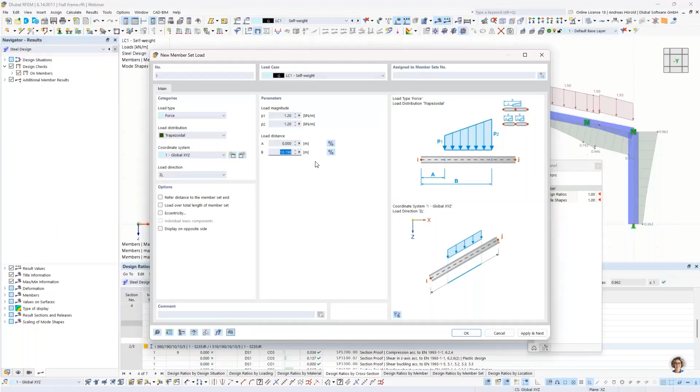It should be a force, not uniform but trapezoidal. Load direction ZL, as you can see on the image. That's okay. The load magnitude should be 1.2. The start is 0, and we measure the endpoint at the half beam, 10.198 meters.

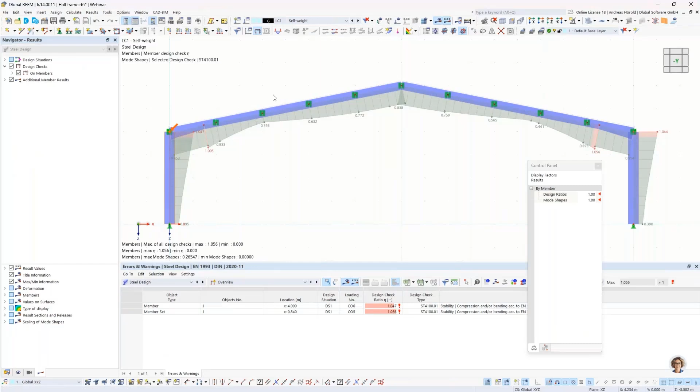This member set — okay, so let's run the steel design again. As you can see, now we have an overloading. The target is to have a maximum design check ratio of 1.0, and we try how many solar panels can be placed here.

So I go back to the self-weight load case, and in the first step I change the load length. I start with a load length of 1 meter. Now we need to activate the add-on module Optimization.

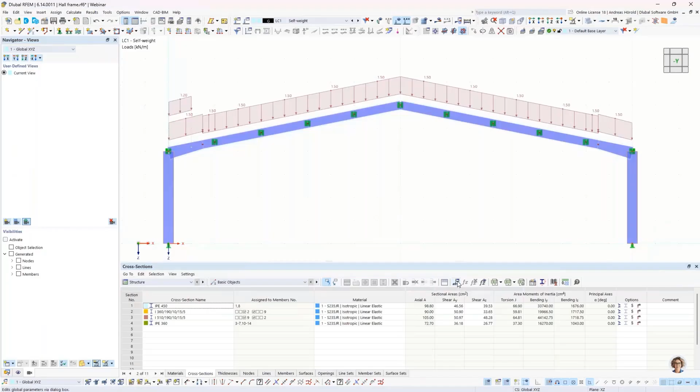So then we have to set a global parameter. I call it solar area — it's the length. Solar area, that should be possible. Length, definition type: optimization. The value is currently 1 meter, and the optimization parameters are minimum 1 meter, maximum 10 meters, and the increment should be 1 meter. That's all.

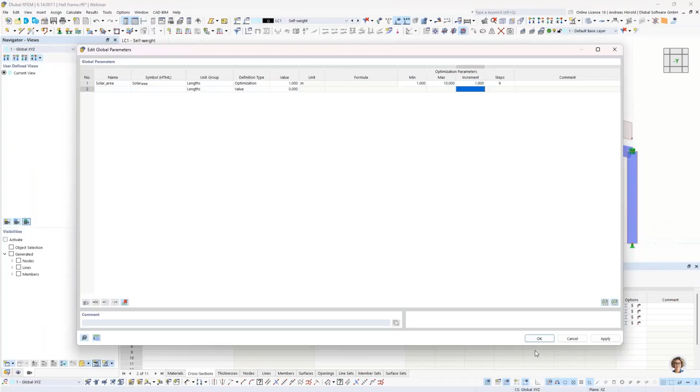Leave the dialog. I go back to the load with a double click, and we assign here the formula. By clicking that button, I select the solar area and insert. That's all for that.

Next, I go to Calculate, Optimization Settings, where there are different optimizers such as particle swarm, ant colony, and so on. I use all mutations since we would like to calculate all possibilities; to decrease the number of calculations you can use such optimizers.

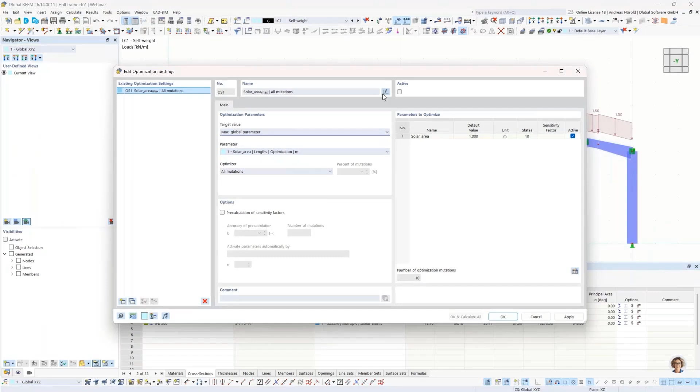We already showed that in webinars about the add-on module Optimization — maybe Max can put a link in the chat to those webinars. So the target value should be maximum global parameter, the length should be optimized, and there are 10 states. I click to activate and run the optimization.

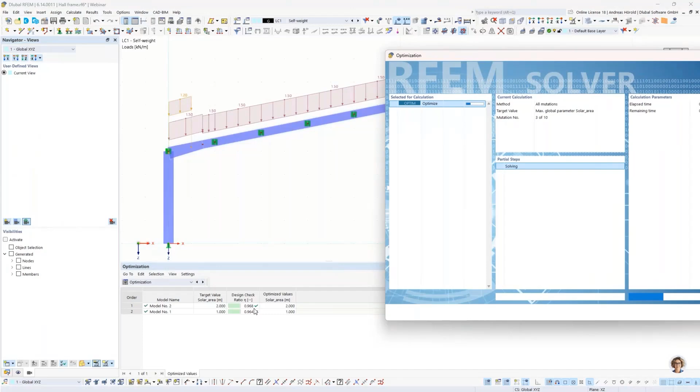So now all 10 possibilities, the different load combinations, and the steel design are running in the background, and we get the first results. For 1 meter we have a small reserve. Now you can see when the load length is increased, the design check ratio will also increase. The maximum design check ratio should be 1.0, meaning 100%.

Now we've got, at 6 meters, 99.9%. The next step should show overloading. Okay, now let's calculate all optimization steps.

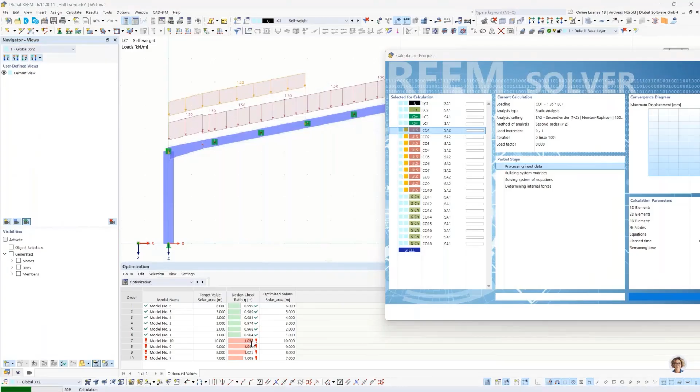Okay, for 10 meters we've got an overloading over 5%, so the program exceeded the maximum length here. Let's go to the steel design, and you can see where the maximum design check ratio is for 6 meters. That means the maximum length for the solar panels is 6 meters.

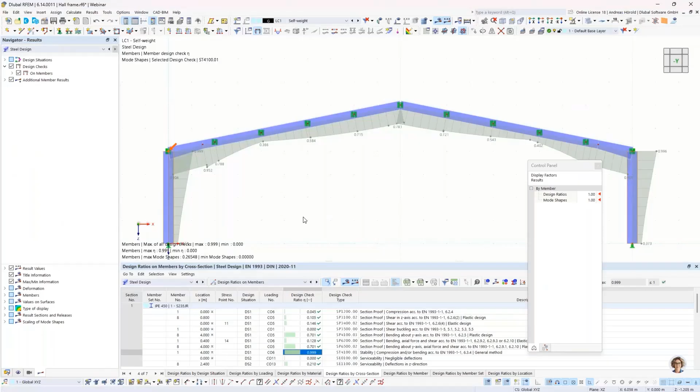You can use that on model optimization not only for loads, but also for cross sections, dimensions, and so on. You can see that in the webinars about the model optimization add-on. Okay, that should be all for that model and for that question.

It's the next model, and the next question is, can I model punching reinforcement using double-headed studs in RFEM 6? That question was asked very often in the past, and now we can provide such a possibility.

In the first step, we would like to run a punching design. So I double click at the node, and in this dialog I check the punching design, without only punching reinforcement in the first step. Let's run the calculation. Concrete design, objects to design. Okay, we calculate the surface and that node.

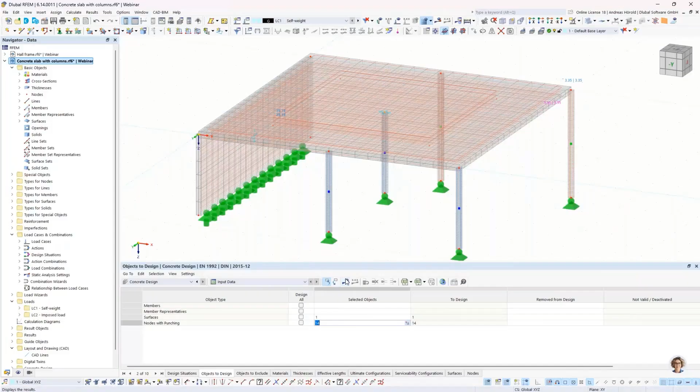So then design ratio on nodes. Okay, that doesn't work, we have an overloading. And let's set or consider a punching reinforcement.

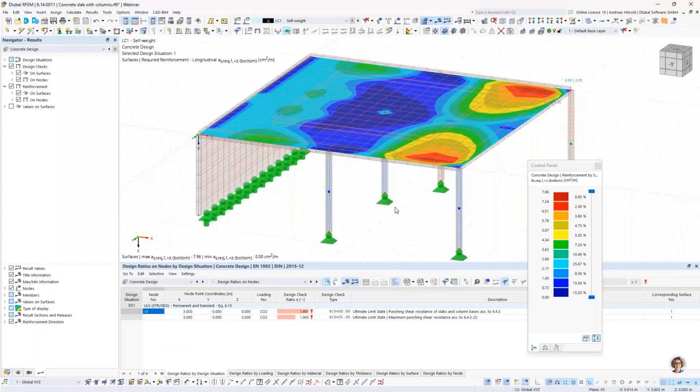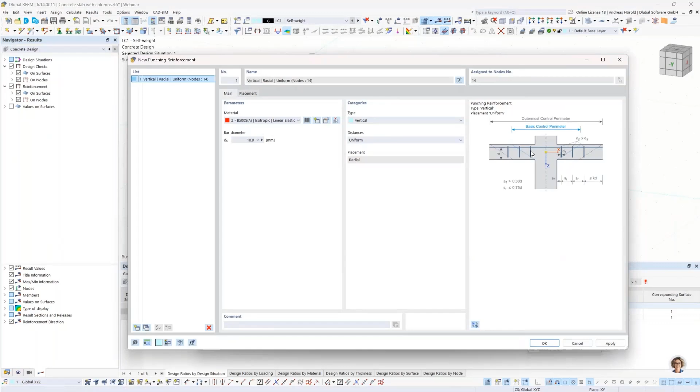I double click the node, then I select a new punching reinforcement. There's the possibility to assign vertical punching reinforcement, but also double-headed studs with a ribbed shaft or with a smooth shaft. I use the ribbed shaft, stud diameter 10 millimeters.

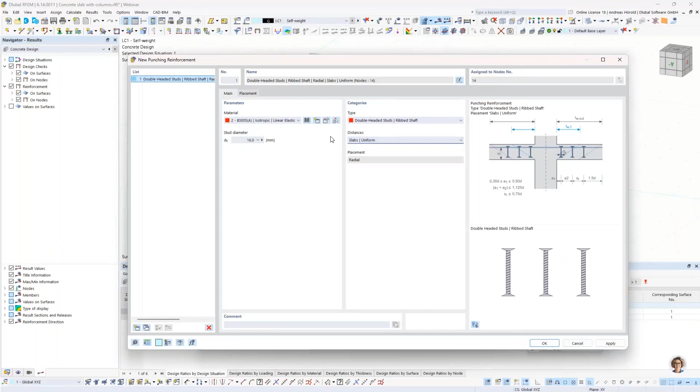You can choose between different distances: slabs uniform, foundation uniform, and general. I use it for slabs. And for these parameters, for example the number of perimeters and so on, I'll leave the default setting in the first step.

Okay, you can see the punching reinforcement here, and I run the calculation. So design ratio nodes. Okay, we have also an overloading. We have to put in more punching reinforcement in the slab.

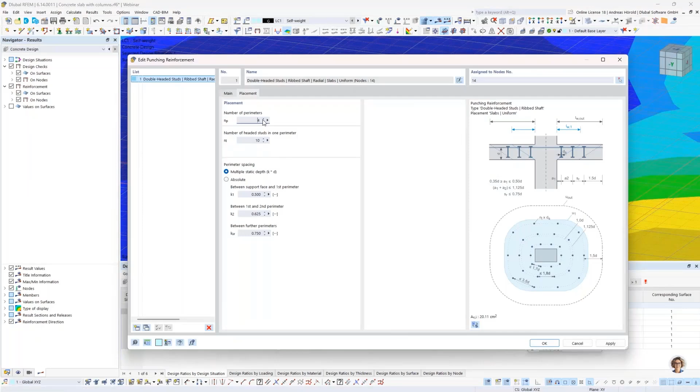I double click on the punching reinforcement, and I have to increase, for example, the number of headed studs and so on, or the number of perimeters. I change the number to 4 and run the calculation again.

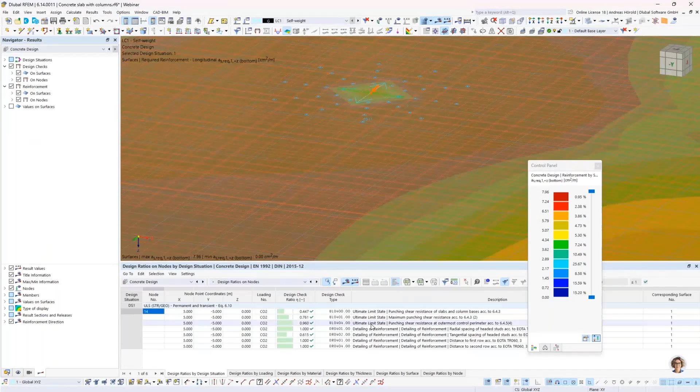Okay, now it works. All design check ratios are under 1 or equal to 1. When you double click on the line here, you can see the design check in detail. And of course, you can print these checks directly to the printer, printout report, or to a PDF. All is possible.

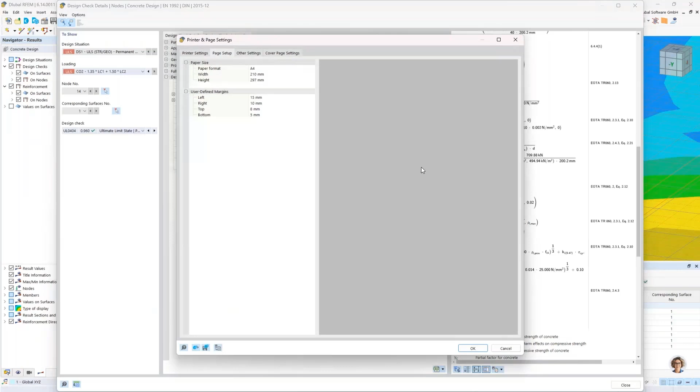Let's take a look at the PDF, how it would look like in the printout report. Take some seconds. Okay, good. That was all from my side.

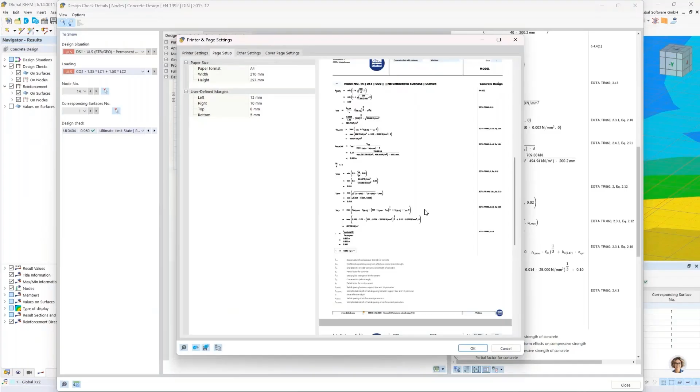So a question we frequently receive in our support team concerns the load application point: how to define the load application point, when it is critical, and when it is absolutely necessary to define the load application point. So I would like to discuss this with you together using a really simple model here.

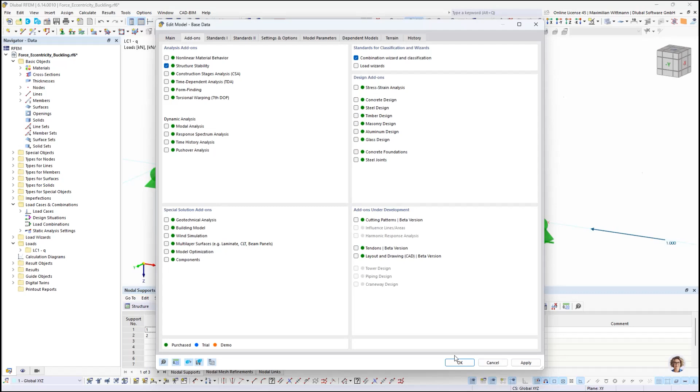All right, so let's go to the base data and have a look into the add-ons. As we can see, no add-ons have been assigned yet, but we will check the structure stability to investigate the torsional buckling later on. Of course, we now have to assign it to a load case, and in this case we only have one load case, and I will activate it at that point.

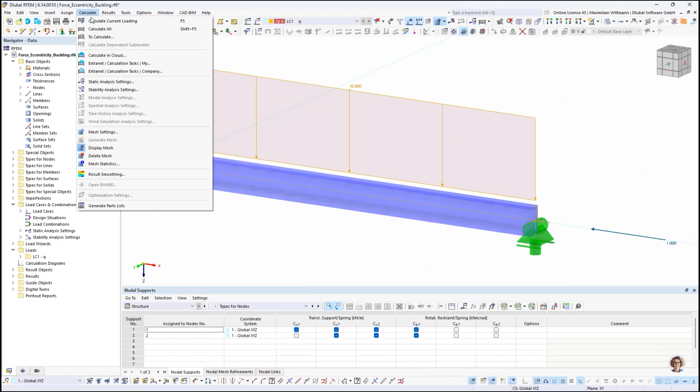Okay, now the question comes up how we can define the load application point itself. To do so, we simply double click on the load itself, and here you find the entry eccentricity. By default, RFEM assigns the external load to the shear center, but if we want to assign it to the center of gravity, we can check this checkbox, and you now see the load is assigned exactly in the center of gravity, and we will expect a twisting moment at that point. Okay, let's confirm it and let's calculate everything.

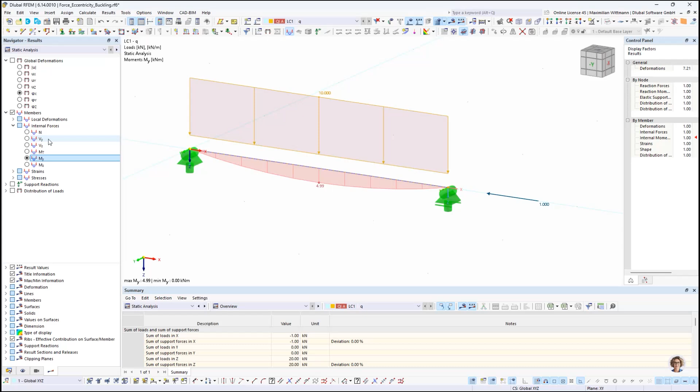In a first step, we want to have a look at the internal forces, respectively the stress resultants. What we can see here is we have a normal force of 1 kilonewton, which comes from the external load. We have a bending moment of 5 kilonewton meters, and of course the corresponding shear forces.

And we also have a bending moment around the weak axis of 0.35, which results from the calculation according to second order analysis, respectively the P-delta effect. And as we expect, we also have the twisting moment here of 0.45.

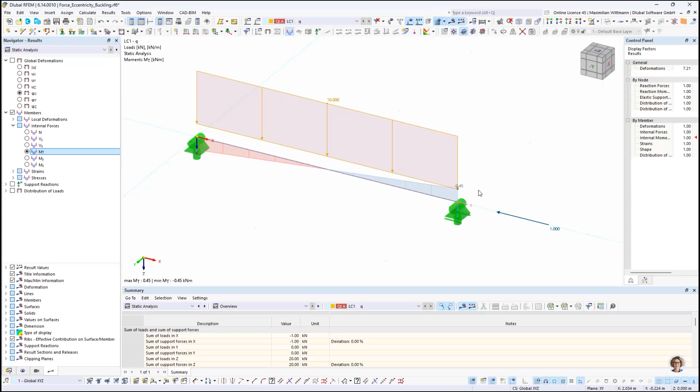But what is much more interesting now is, of course, the stability analysis. Let's have a look at the critical load factor, and this is 405, which means we can increase the load by the factor of 405 until stability problems occur.

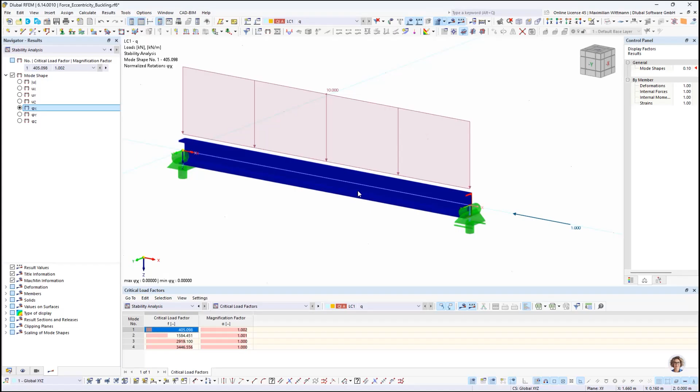Let's check the mode shapes here. What we can observe is that we have purely lateral buckling at that point. Usually we would expect also torsional effects, but when we check the rotation around the x-axis, we see this is 0, which means at that point it seems that it's only affected by the normal force. This is because we currently calculate with 6 degrees of freedom, meaning that, for example, torsion or bending moments cannot induce axial stresses, for example, here in the top flange.

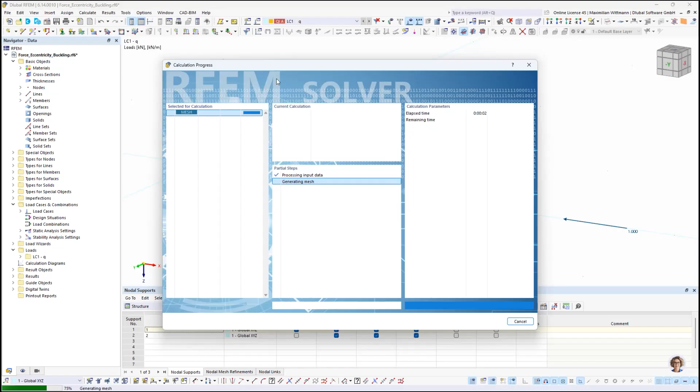So in the next step, we now activate under add-ons also the torsional warping, so the calculations with 7 degrees of freedom, and calculate everything again. Now it's really interesting what happens with the factors.

If we go back to the stability analysis again, the first thing we see is that the critical load factor dropped significantly from 405 to 9.5.

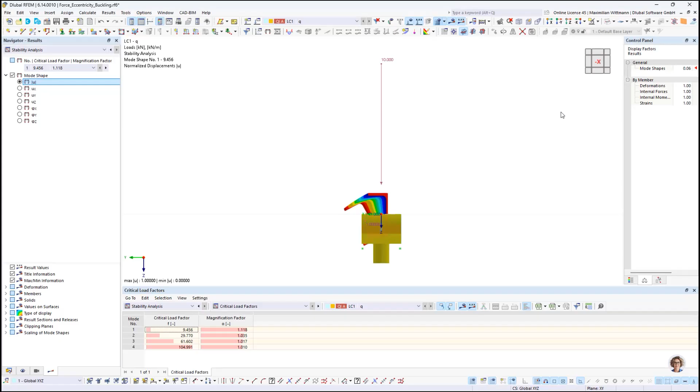When we check the eigenmode, the mode shapes, we now can see that the eigenmode shows not only lateral displacement as before, but also cross-section rotations. This is what we would expect from bending torsion or bending buckling in this case. Also, when we check the rotation around the x-axis, we now can see that this also has an effect. In total, this means that if we ignore torsion effects and the normal stresses resulting from them, we would significantly overestimate the entire system at that point.

But this is not even the worst case scenario, because we now can additionally change the load application point to the top flange. We then will expect additional destabilizing effects, as you know. And how can we do that?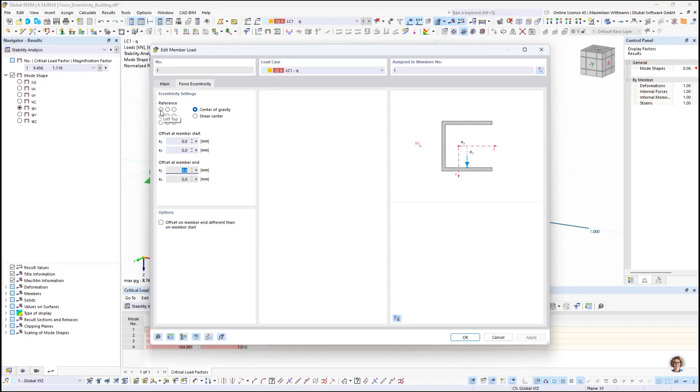We here can change the reference point to the most top left point, and then enter manually the distance to the center of gravity, which was 21.7. Let's hit OK. And when we now go to the side view, we see that the load straight comes down to where the center of gravity hits the top flange. So when we now calculate everything again...

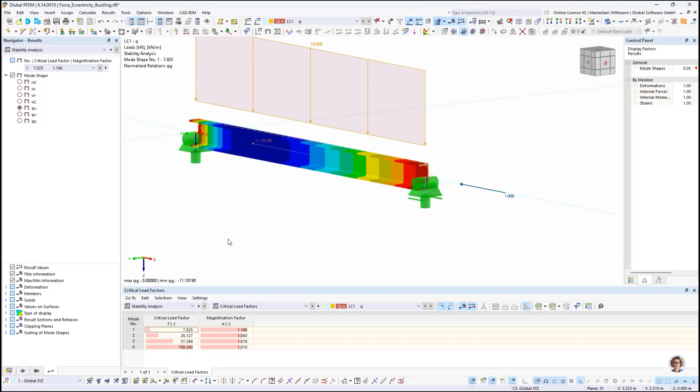We are once again interested in the critical load factor. Please remember, last time we had 9.5, and now it once again dropped to 7.0. I think at this point we really can see that as soon as we have torsional effects, it is absolutely crucial to consider the load application point and the resulting destabilizing effects.

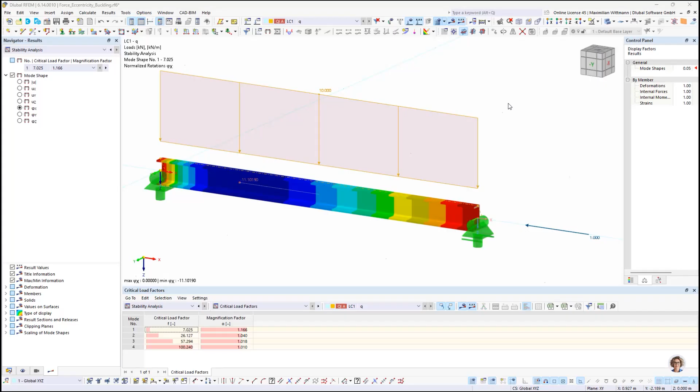Now, some RFEM expert users might say, but what about our stability checks in the steel design? Aren't these effects what we have seen not covered by the stability checks? To discuss or explain this question, we now have a look into the steel design and go to the appropriate settings. So we find it here under steel design, then ultimate configurations.

When we double click on the default value, we have this tab here, member stability. Here you find the important section, the position of the positive transverse load application. Here the vertical position is set by default on the profile edge with the destabilizing effect, exactly what we have seen in the previous example.

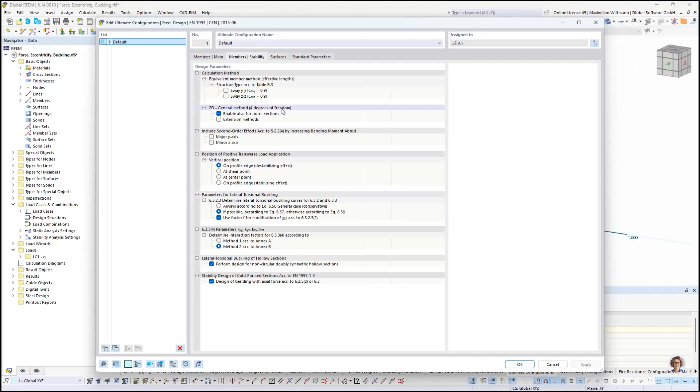However, the problem comes from the standards, because in the standards for both methods, the equivalent member method as well as the general method with 4 degrees of freedom, torsion is not considered in the stability checks. So once again, the problem comes from the standards. But we really have seen how important the stability effects that result from torsion and bending are, and that they cannot be ignored at that point, especially for thin-walled open structures.

This is why for these structures where we have these torsional effects, unfortunately the equivalent member method as well as the general method would lead to results on the unsafe side. So my answer is always, please use our add-ons with 7 degrees of freedom to gain results on the safe side. All right.

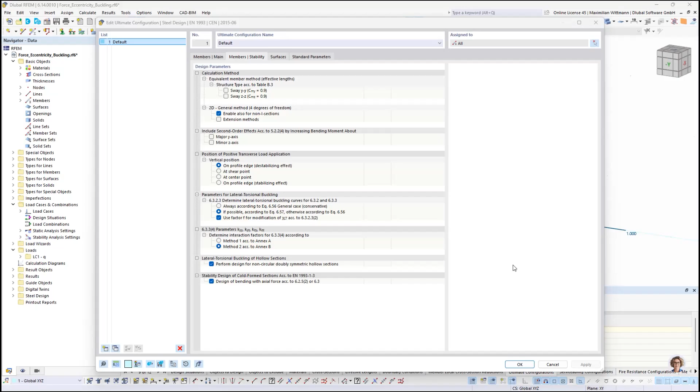So let's move on to the second example of this webinar. We often receive the question if there is another possibility to investigate the effects of torsional warping rather than using the analysis with 7 degrees of freedom. And yes, in principle, you also could use shell elements to detect the behavior of torsional buckling.

So let's copy the actual system. Let's create a copy, and we copy it in a distance of 1.5 meters in the y direction, and also we include the loading here at that point.

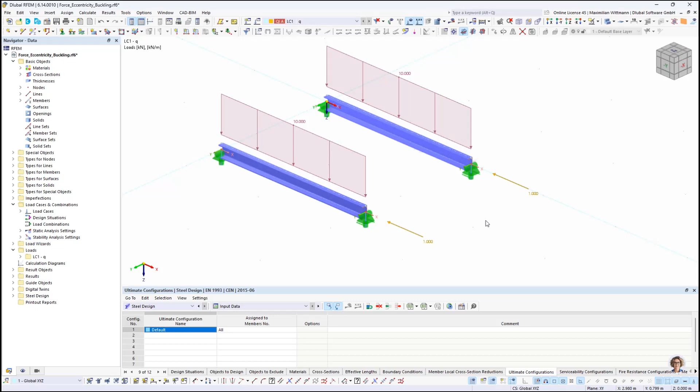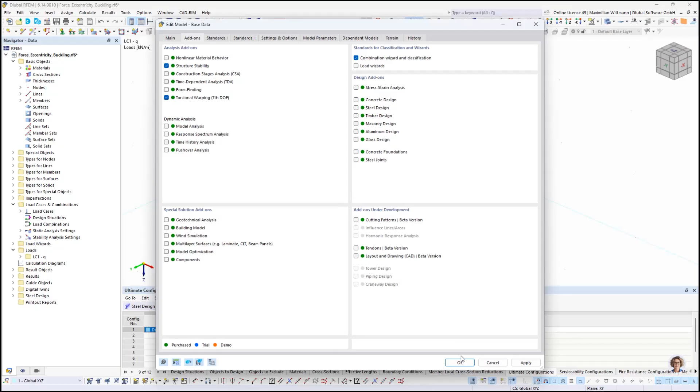What we have seen in the previous example is that the axial forces are of minor impact and interest here for this system, and it's dominated by the uniform distributed load. Also we can change the sliding supports to normal pin supports at that point. And what is also not necessary are the steel design settings, so we can turn that one off too.

In order to create shell elements, we have a simple option here in RFEM. Just select the member, make a right click, and then under members, you can generate a surface from members.

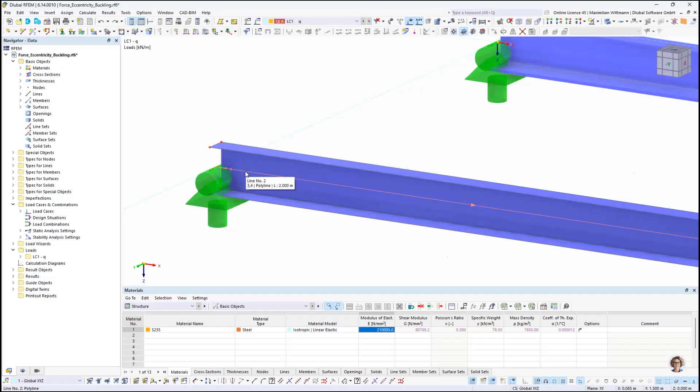Probably you already noticed that we now lost our uniform distributed member load. This is because we are now dealing with surface elements, and of course lines and line loads, not member loads anymore. What is also still remaining from the original system is the centroidal axis. So we have this information, but for now let's focus on the loading.

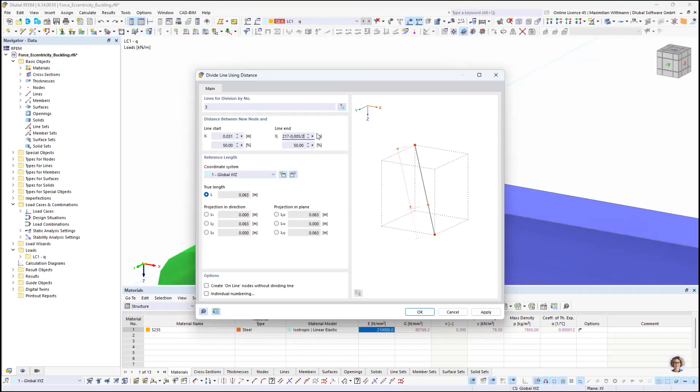I want to split this line to hit the center of gravity. I use the divide line command at a distance, and as I know that the center of gravity has a distance to the left side of the web of 21.7 millimeters, I additionally must subtract half of the web thickness. So let's enter this: 0.0217 minus 5 millimeters divided by 2. And here we go, we have the new point.

So now we can draw the line to the other side of the beam, and we can be sure that we are now in the plane of the center of gravity. So we now can assign the line load. Still we have 10 kilonewton per meter, and we assign it to our new line. Let's hit OK, and we have our load back at that point.

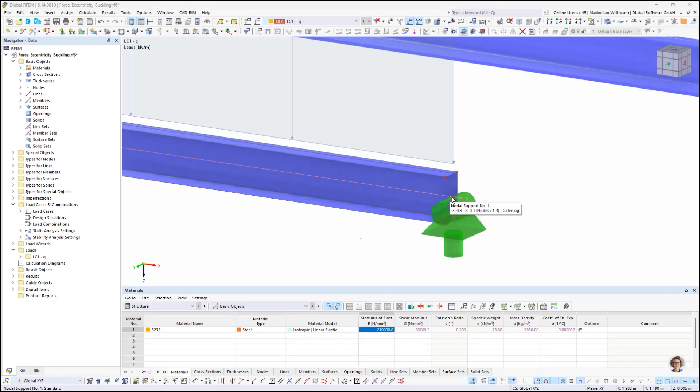What still catches the eye at that point is that the pin support is connected to the centroidal line, but we do not have any connections to the surrounding surface elements up to now. But this is no problem in RFEM. We can go under types for nodes and introduce nodal links.

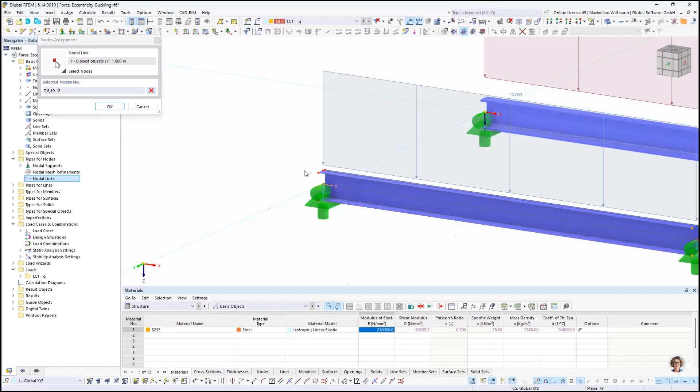Here in the first step, we have to select the outer nodes of the cross sections on the right and on the left side. Confirm it, and what this method does is it searches the nearest elements to these nodes.

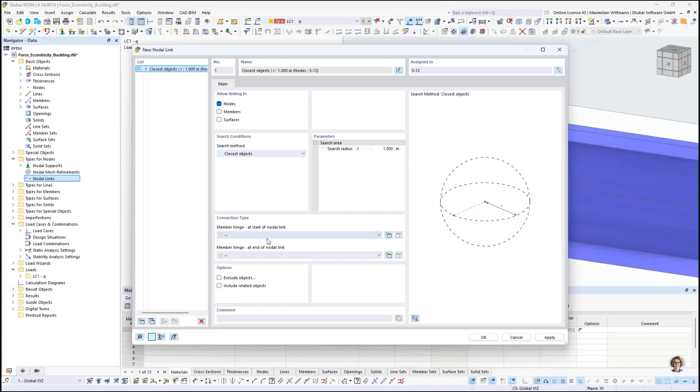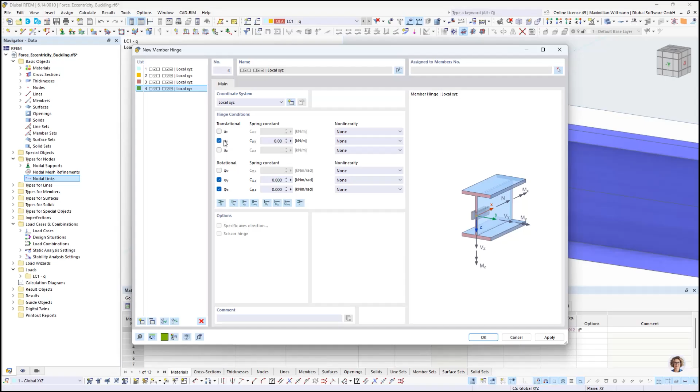What is really important to mention at that point is that when we think back to the member beam, we did not define any transverse stiffness, for example, in the area of the supports. So we have really a free warping behavior in the area of the supports. And we must, of course, model the same effects here for the surface elements, and for that we can release the degree of freedom in the local y direction of the rigids, which corresponds to the global x-axis. Let's hit OK, and we now can see that the connection is created.

Now let's have a look also in the mesh settings. 0.5 meters is too coarse here, and I decide to go with 1 centimeter.

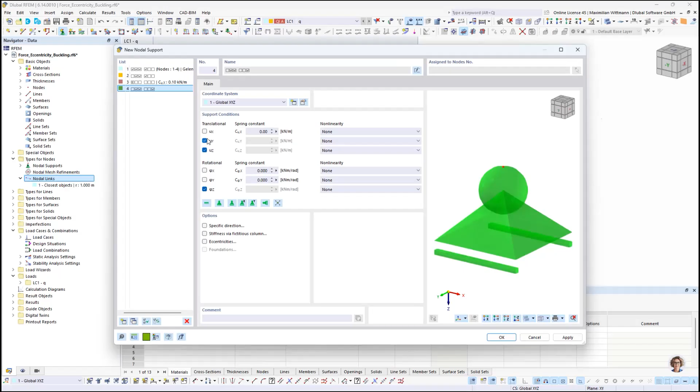What is still missing: we now would have a free movement in the global X direction due to the introduced links. To get a stable system, I create a new support here and introduce a really small spring at that point. Hit OK, and assign it to this node.

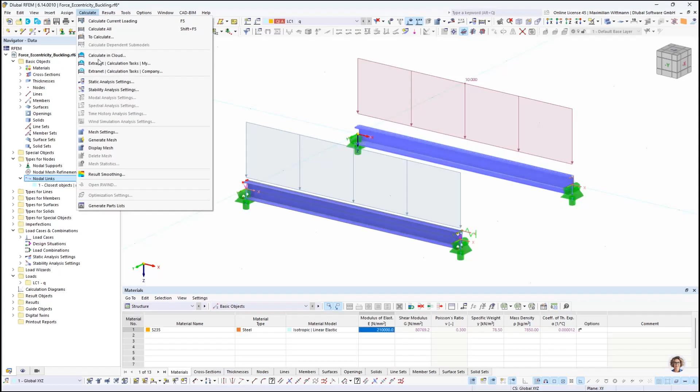Okay, let's check the results at that point. So it converges perfectly. And in the next step, let's move on to the stability analysis and check the critical load factors.

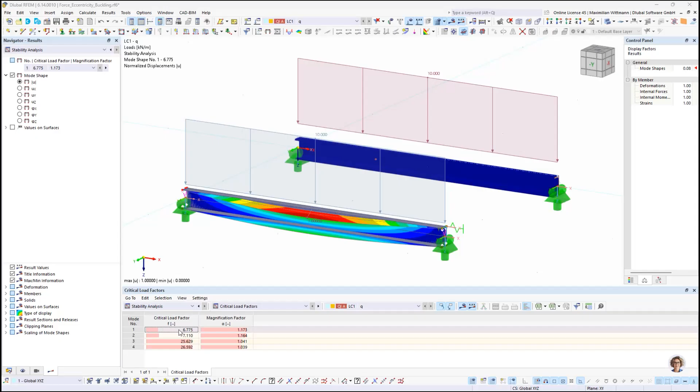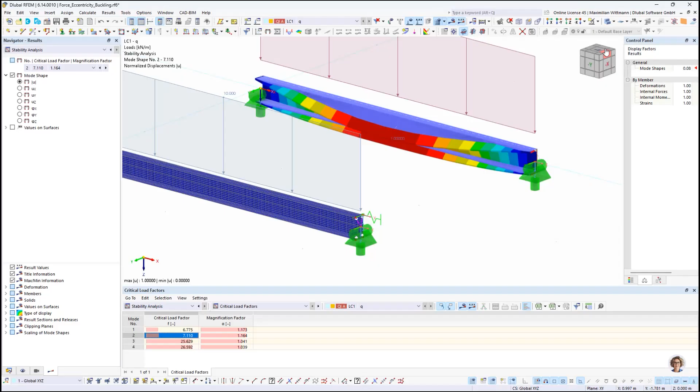Let's compare the mode shapes. The first critical load factor can be found at 6.8, and it is assigned to the surface model. The next one is 7.1, which is assigned to the member beam. So we can see we only have a deviation of approximately 4%, and this is a really good result that we achieve here.

Also, I want to have a short look at the free warping at the end, and when we increase that factor a little bit, you can see that we have free warping here at the supports, and the same occurs when we check the rotation around, the deformation in the X direction, and you see we have the same effect here. So one could say we have really good results also when it comes to torsional buckling and working with surface elements. All right, perfect.

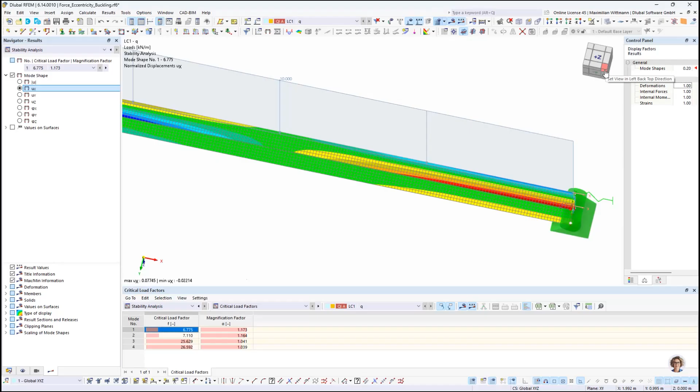Okay, so let's move on to the last example. Here we want to talk about built-up cross-sections, respectively composite cross-sections. We often receive the question how to model multiple cross-sections or assign multiple cross-sections to one line while having full control of the independent profiles.

Once again, I brought a very simple model here. This is just a line with a length of 5 meters, and we have the pin supports with an axial force of 10 kilonewtons. This, for example, could be a wind bracing, and I decided to apply a compression force here because I want to talk about steel design afterwards.

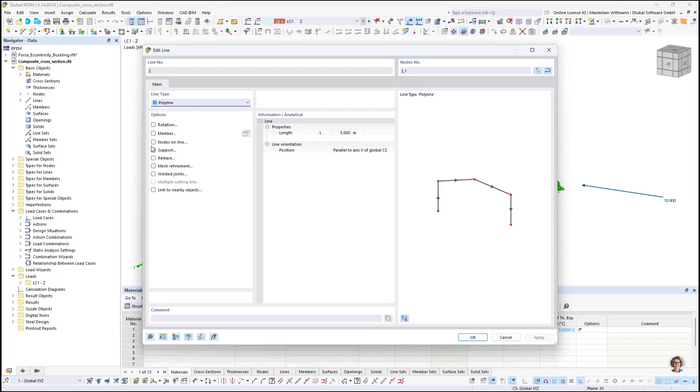So what would be the standard way to apply here a built-up cross-section? You see here on the left side, when you do a double click on the line, you can assign a member, and then under cross-section, we can pick a new one from the library, and you find the built-up cross-sections in this section here. In our case, I want to use an equal-leg angle, and I think this one would be good here.

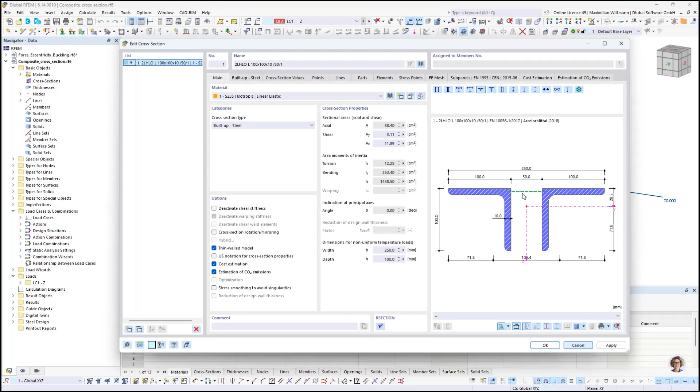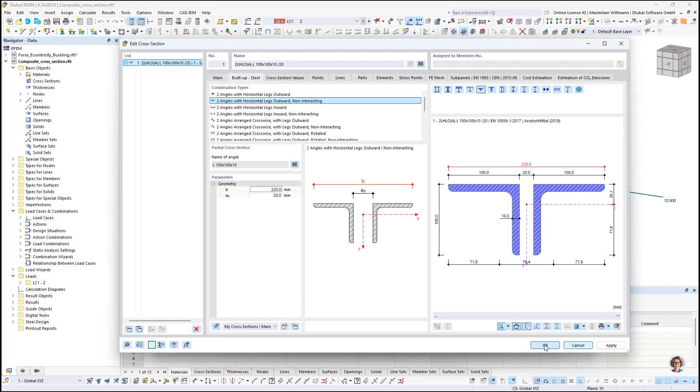But as you can see, the green line represents an interaction between both profiles, and I really want a decoupled system here. So we can go over to the second tab, and you see you can choose between different directions between the two angles here. In the second one, the green line is not there anymore, which means we have a decoupled system. So I want to go with a distance between the angles of 20 millimeters. I hit OK, OK once again.

And we now check if it is applied correctly. And yeah, this looks good.

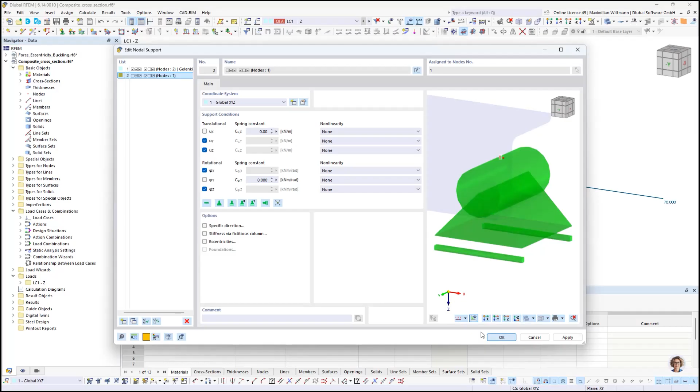Okay, what now still catches my eye is the fact that we have to lock the rotation around the local x-axis in order to get a stable system here, because for now the beam could rotate around its own x-axis. We have to do it for both supports, also on the right side for the sliding support. Let's also activate or lock the rotation at that point. And now everything should be ready for calculation.

Let's hit calculate all. What you can see is that I already activated the steel design, but in the first step, we want to check the internal forces here.

So as you can see, when we look at the normal force, the axial force results in an entire normal force in the section, in the cross section, even though we have two profiles here. Of course, if you want to use this bracing in an entire 3D system, the stiffness is implemented correctly. So all cross-section properties are assigned correctly. The overall behavior is correct.

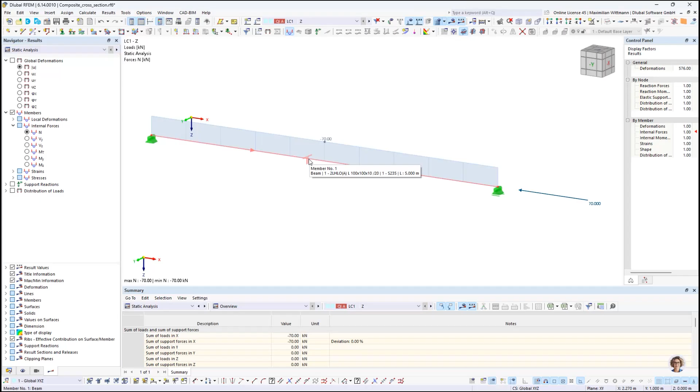But if you want to perform detailed checks for every single profile, we have to find another solution. This you also can see if we go over to the steel design, we get the error that the design is not possible due to invalid section shape for design. So the question comes up how we now can achieve this.

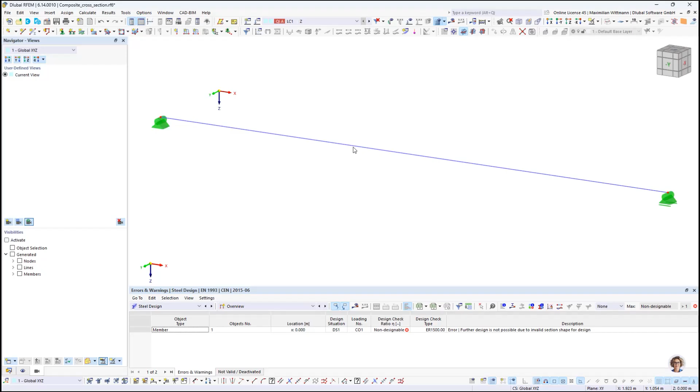The keyword here is line releases, but we will come to this later on. In a first step, we have to change the composite cross-section and swap it to a standard cross-section. For this, we can go to the library and you find here the standard cross-sections. We want to have an equal angle, so we can take this one, and it was a 100 times 100 times 10 millimeters.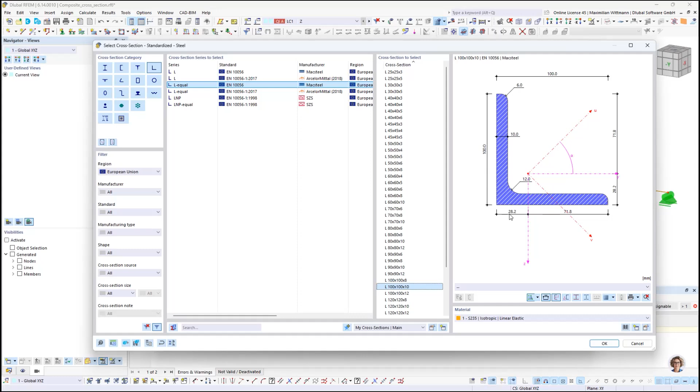And what also catches the eye here is that we have a distance to the centroid of 28.2, but still we want to realize the gap of 20 millimeters. So we have to add additional 10 millimeters to end up in the center line, so we end up with 38.2 millimeters. All right, so we see we still have to rotate it by 90 degrees.

And now we see we can assign the eccentricity to the local Z direction. This can be found under main and then eccentricities, and here we can define a new one. For this purpose, it's good to work with absolute eccentricities, and as we said, in the Z direction, minus 38.2 millimeters. Let's hit OK.

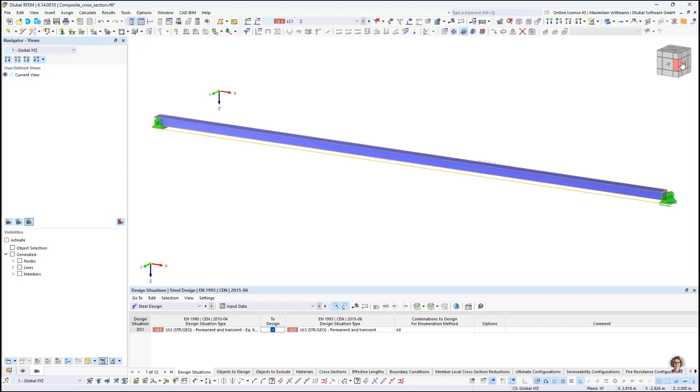We have to assign it not only at the member start, but also at the member end. Let's hit OK, and let's check if everything is correct. Okay, so we have the first half of the composite cross-section at that point.

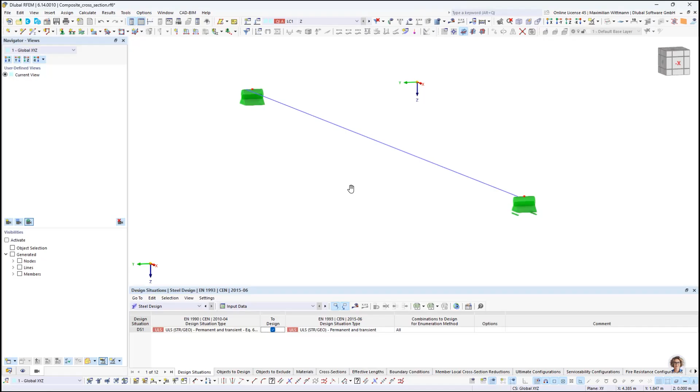Okay, now we must find a solution how we can add a second profile here and assign it to the same line. Of course it's not the same line, but we have another possibility, and as I mentioned, we have line releases. Let's have a look at this option.

You find it here under data, and then under the special objects, we can add a new line release. So let's go through this dialog, and in the first step, we have to assign the line, of course it's our basic line here, and then let's have a look at the picture. What it does is create a second line that is released, where we can define the interaction between the two lines. This can be done by the line release type.

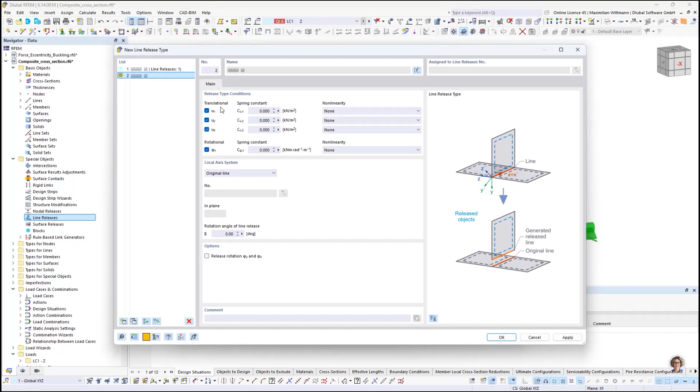Let's create a new one, and as we don't want to have any interactions, we can check every degree of freedom, confirm by OK. And so the next step is the released objects.

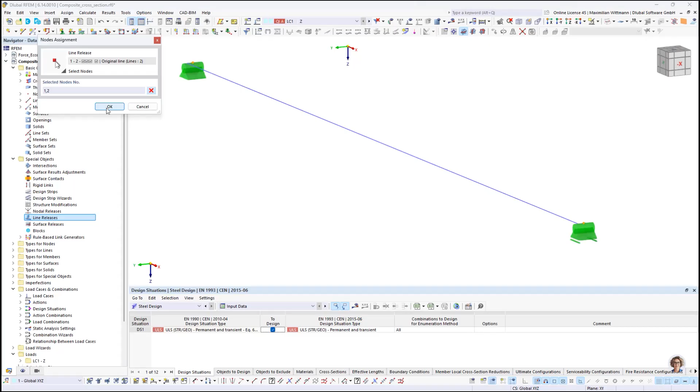In this case, it's clear we have to release a member, so let's select our member. What's also very important is the definition of objects and the nodes as definition nodes. So when we select the outer nodes at the supports, these nodes are not copied, they stay original, and the load transmission takes place at these points, with no interaction along the lines. Let's hit OK, and everything is ready here.

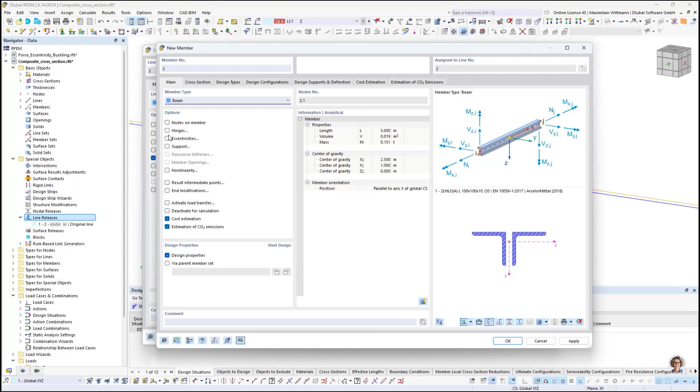Now we have a second line to which we can assign a second profile. This can be done by double clicking on the new line, and then we can check that the line also has a member. When we go to cross sections, we can choose the latest cross section, and we see that we have to rotate it once again into the correct position.

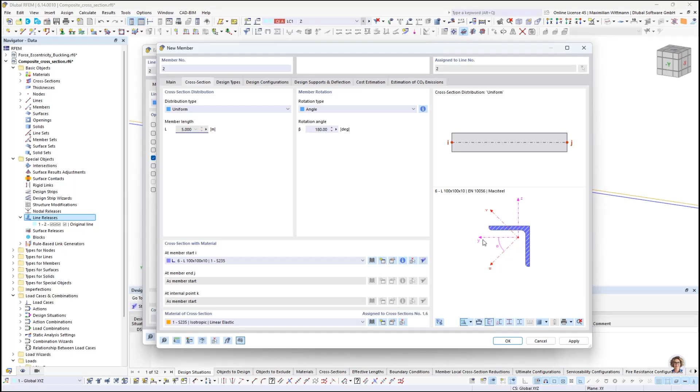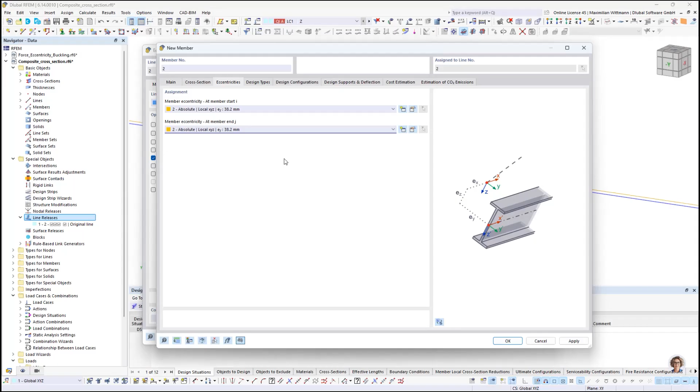This time we have to use 180 degrees, sorry, and this time the eccentricity must be assigned in the local y direction. Let's do this the same way: we create a new eccentricity, once again absolute, and assign it in the local y direction with 38.2, once again assigned to the member start and the member end. Let's hit OK, and hopefully now the cross section is correct.

And yeah, perfect. So we see everything worked fine.

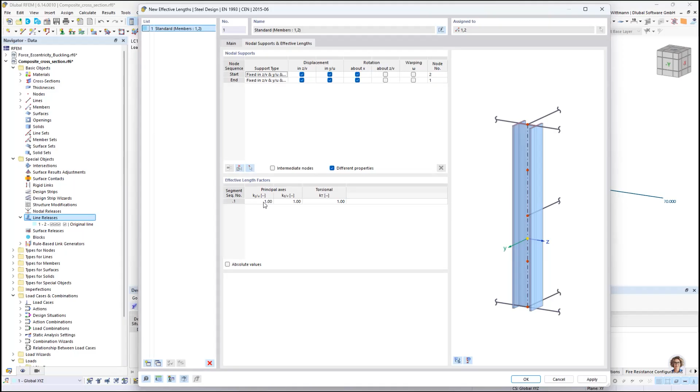But before we start the calculation, we still have to assign the effective buckling length to both profiles. We can double click on them, and under design types you find the effective length. We create a new one; in this case all standard settings are okay. We want to perform all checks here, and the nodal support settings are also okay since we have an effective length factor of 1.0. Let's confirm that and click OK.

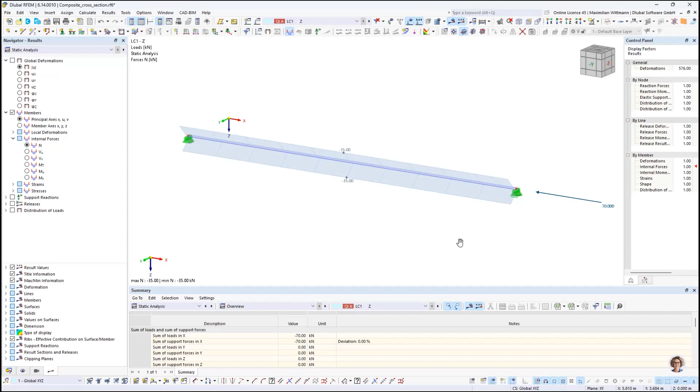Now we are able to run the calculation. Our goal at this point is, of course, that the external axial force should split up and be assigned half of it to each profile. And this is what's happening here, so now we have the results we expect.

When we go on to the steel design, we also notice that all checks are performed, and that flexural buckling about the principal V-axis is crucial here. By double clicking on it, you also have the entire check on the right side. You could print that to the printout report. So everything is as we expected.